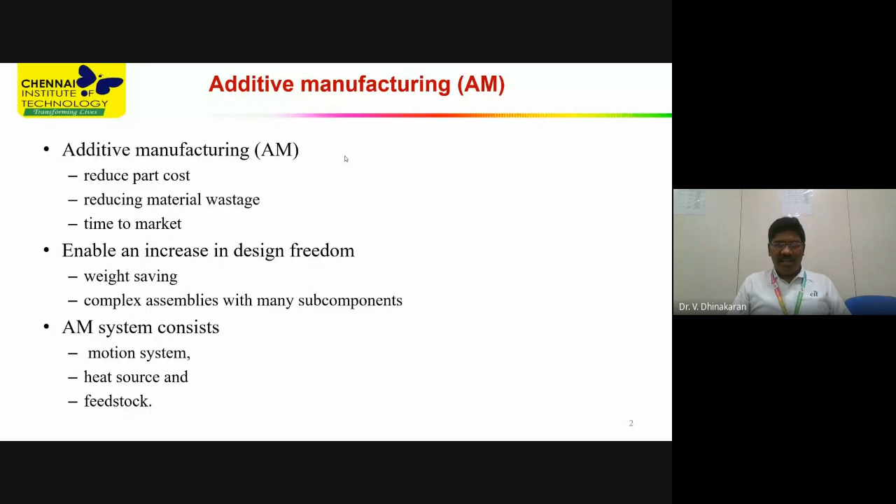For any additive manufacturing system, three components are very important. One is the motion system, another is the heat source, and another is the feedstock. These three systems are highly required in order to experience additive manufacturing.

So the basic difference between additive manufacturing, subtractive manufacturing, and formative manufacturing. In formative manufacturing, the molten metal has to be poured into the mold cavity, and the required component will be manufactured. Whereas in subtractive manufacturing, the raw material has to be processed through any one of the material processing technologies in order to get the correct component. In subtractive manufacturing, almost 50% of material is being utilized to manufacture the particular component. In a formative manufacturing system, the material has to be heated, and the molten material has to be poured into the mold cavity to form the part. Okay.

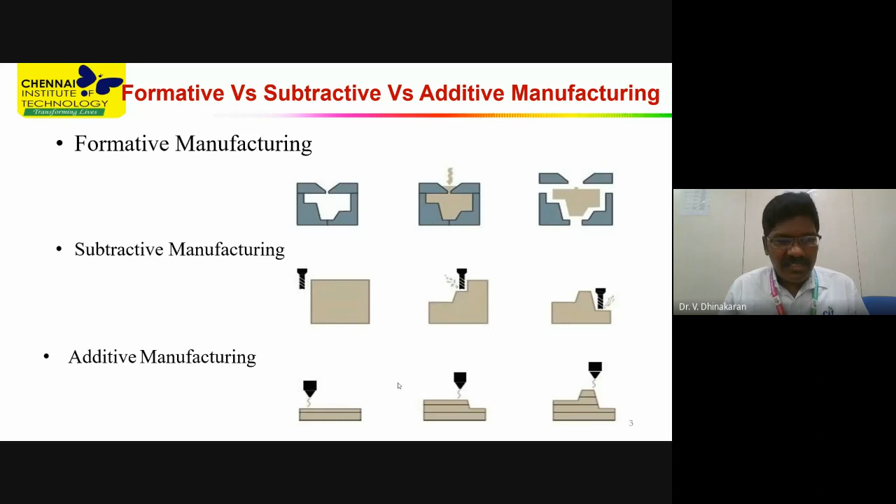So hence, we are highly concentrating on additive manufacturing to process the high-cost materials and the materials which are being used in the industries. So in additive manufacturing, what is being done? Here, you need to have CAD-based 3D models, and the 3D model has to be converted into a .stl file. You can use any modeling software to generate the CAD model, like CATIA or SolidWorks, and then the file type has to be converted into a .stl file.

After that, the .stl file is subjected to slicing into layers, because in additive manufacturing the product is manufactured layer by layer. Hence, according to our process, the entire product has to be sliced layer by layer. Then the sliced layers are given to the AM system, the additive manufacturing system, which manufactures the part. Once the part has been manufactured, it has to be processed to get the right product by using surface finishing methods. This is the general procedure used in additive manufacturing techniques.

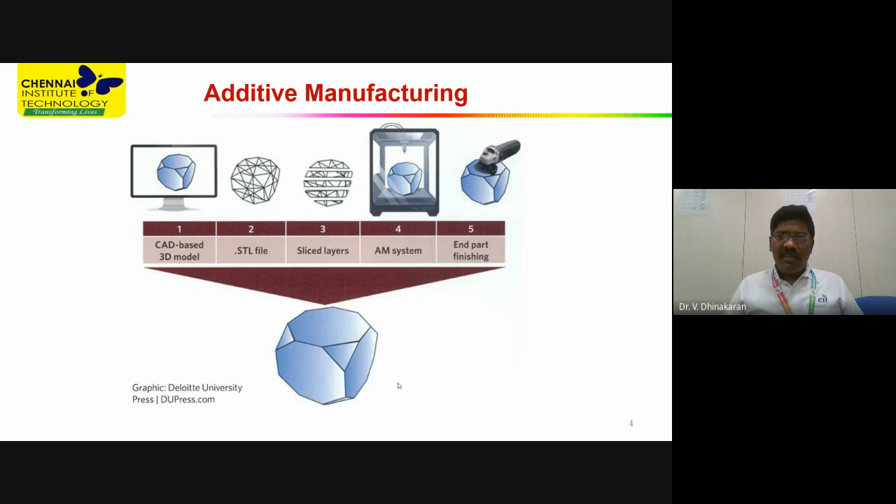So you should have the CAD models, which can be made with any modeling software. Then the file format of the model has to be converted into a .stl file. Then the file has to be sliced layer by layer. Then that has to be fed into the additive manufacturing system in order to produce the required component. Then it has to be finished to have a good surface finish.

Then, classification of additive manufacturing. As I said, three things are highly essential: one is the heat source, another one is the feedstock material, and another one is the motion system. Any additive manufacturing holds these three systems. Here we want to classify based on the heat source utilized. The heat source may be either a beam heat source or an arc heat source.

Beam heat source means you can use a laser beam or electron beam to manufacture the particular material. In both laser and electron beam, you can use either wire or powder. The wire can be melted by the laser, or the powder can be melted by the laser to produce the particular component. We will see how the laser is used to melt the wire or powder in the forthcoming slides.

The wire will be melted using a laser heat source or electron beam heat source, and that will be deposited in the substrate material in order to attain the correct shapes.

Okay, correct material. So we have laser as heat source, and wire is the feedstock material.

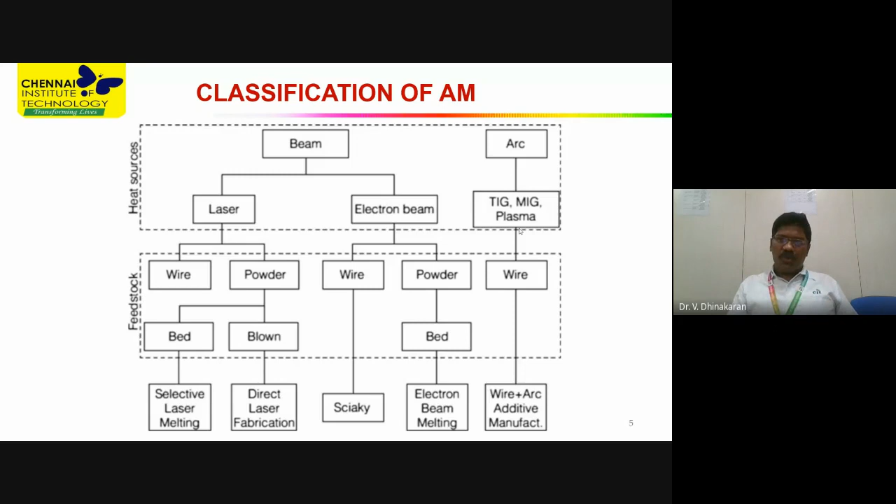So this is the classification based on the types of heat source used. Then, classification based on the technology or techniques.

So, binder jetting. When you use binder jetting technology, there may be two layers, and in between the two layers, a binder can be used to bond or make bonding between these two layers.

Okay, this is called powder bed and inkjet printing - powder bed and inkjet 3D printing. Based on the powder-based diffusion, as I said, you can use direct energy deposition.

Direct energy deposition means directly the wire will be melted, and it will be deposited on the surface.

Or directly the powder will be melted, and the melted powder or molten material will be deposited on the substrate material. That is called direct energy deposition.

Okay, directly your energy is utilized to melt the material, then the molten material is deposited on the surface. This is called direct energy deposition.

Whereas in the powder-based diffusion, the powder will be spread on the substrate material, then selectively...

with the help of the motion system, the laser heat will heat the material and the shape will be formed. This happens in the powder-based system.

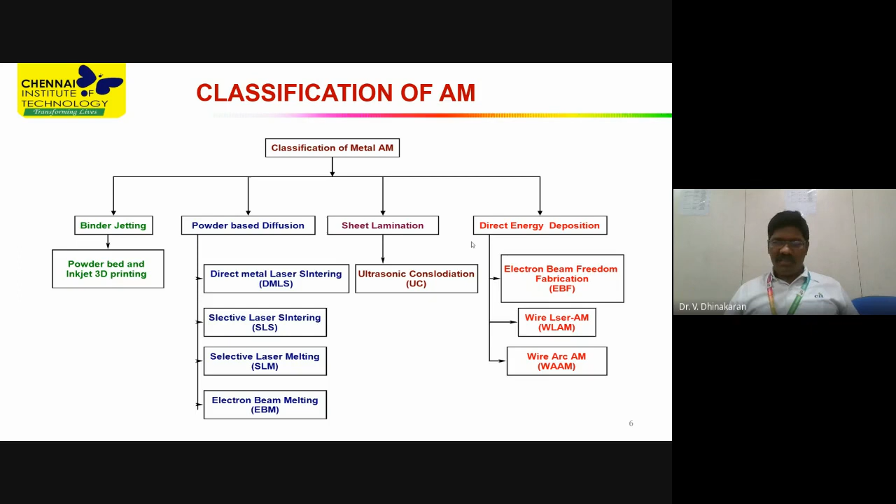Now further, I want to classify based on polymer utilization - how polymer materials are being utilized in additive manufacturing. Because when you go for metal additive manufacturing, it is very costly. So additive manufacturing will help you to realize the component immediately.

In olden days, what you needed to do was go for making the die. You are making the die, then the die has to be ordered from some other person, die manufacturers, then they will supply the die, then you will go for manufacturing the particular component. At that time only you would be able to touch and feel the component.

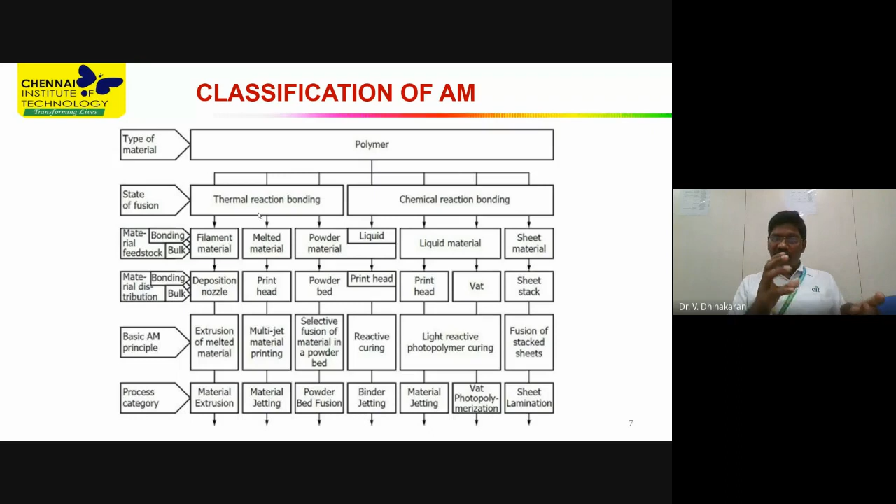Now you have modeling software. You will be able to design the component, you will be visualizing the 3D part, but it will not give the touch and feel effect. Now you have 3D printing machines. Since metal additive manufacturing is high cost, the machine cost is very high, you cannot immediately manufacture a particular part and you cannot visualize or have the touch and feel effect.

We have 3D printing technology, polymer printing technology, with low cost machines. Hence polymer is playing a major role when 3D printing is concerned. Generally there are two types of fusion being utilized: one is thermal reaction bonding, and the other is chemical reaction bonding.

In thermal reaction bonding, the filament material may be deposited or melted. The filament material will flow through the nozzle, while it is flowing through the nozzle it will be heated, and the molten material will be extruded through the nozzle and deposited on the particular surface in order to make the particular product.

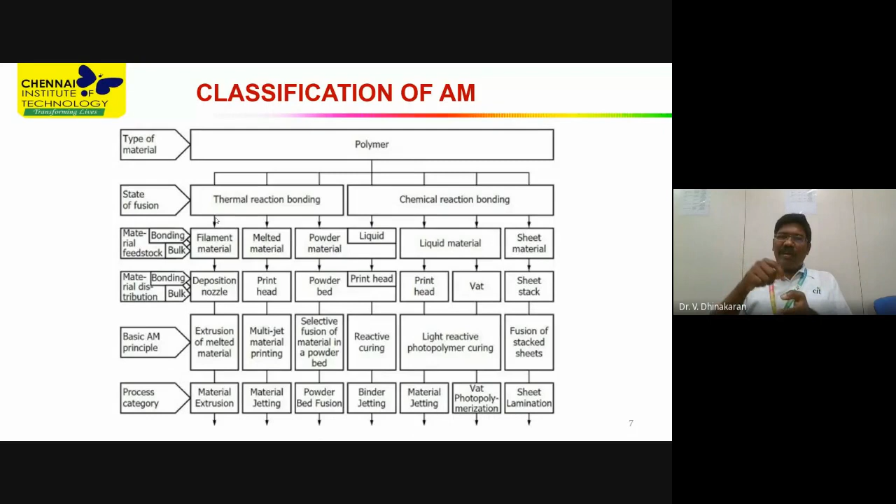In chemical reaction bonding, there is VAT photopolymerization. What is that process? There is a liquid material, and the liquid material is exposed to UV lighting, selectively exposed based on the component which is going to be manufactured. In the selective areas the liquid material is exposed, then the solid is formed, or the required component is formed. That is VAT photopolymerization, which happens because of chemical reaction bonding.

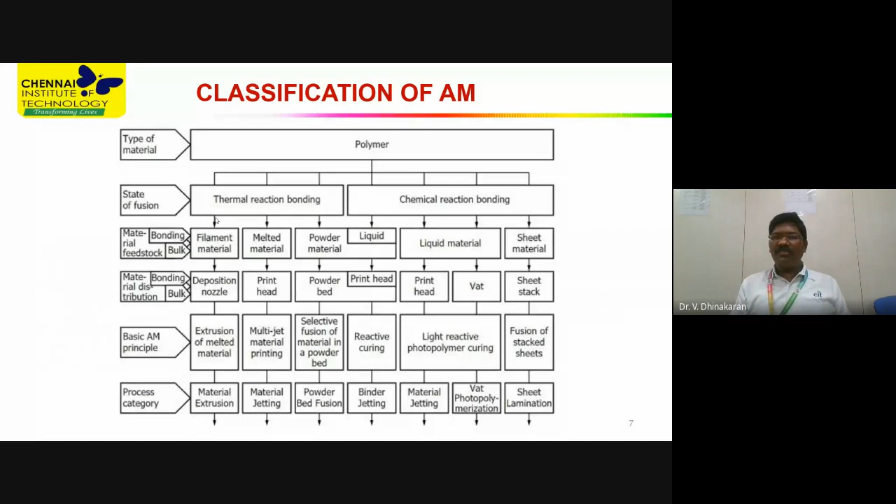These are the classifications of additive manufacturing based on thermal reaction bonding and chemical reaction bonding.

Now, where is additive manufacturing used? Nowadays it is used in all applications. But I want to mention a few. When you go for biomedical, it is being used. When you go for automotive, it is being used. When you go for aerospace, it is being used. When you want to make household materials, it is being used. So it is playing a role in all applications, and additive manufacturing has almost captured applications in the entire world.

Now it is being developed to overcome the traditional manufacturing system. However, mass manufacturing is still difficult in the case of additive manufacturing. But nowadays, different technologies are being emerged together in additive manufacturing in order to bring the manufacturing technique for mass manufacturing. A lot of developments are coming day by day.

For aerospace material, when you go for aerospace applications, you are using aluminum, stainless steel, titanium, cobalt, or nickel superalloys. When you compare these materials, titanium is highly used in aerospace applications.

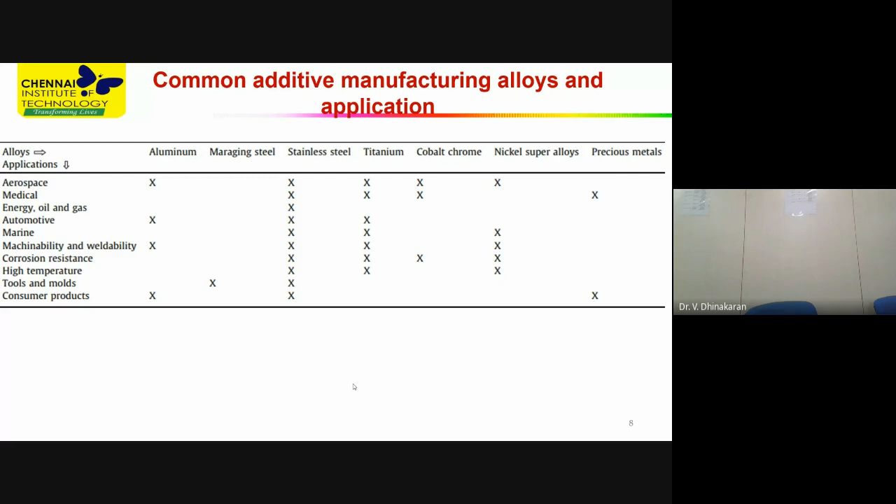Just a minute. Just a minute. Yeah, sorry for the interruption.

Titanium material is highly used in the aerospace industry. The reason is, when you compare titanium with stainless steel or aluminum: aluminum may have a density of 2,500 to 2,800 kilogram per metric cube. Stainless steel is around 7,000 to 7,800 kilogram per metric cube. Titanium is having only 4,000 to 4,200 kilogram per metric cube. So the density may be almost double that of aluminum, and maybe two-thirds of stainless steel. But the strength provided by titanium is enormous. Hence, titanium is highly used in the aerospace industry.

When you go for titanium and its family, Ti-6Al-4V is one of the important alloys used in aerospace as well as biomedical applications. It is simply called Ti64 in industry, and Ti64 is called the workhorse of titanium. The reason is, if 100% of material is going to be chosen from titanium and its alloys, 80% of that material will be chosen from Ti-64. Try to understand the importance of Ti-64 material. Hence, Ti-64 is one of the important materials as far as aerospace is concerned.

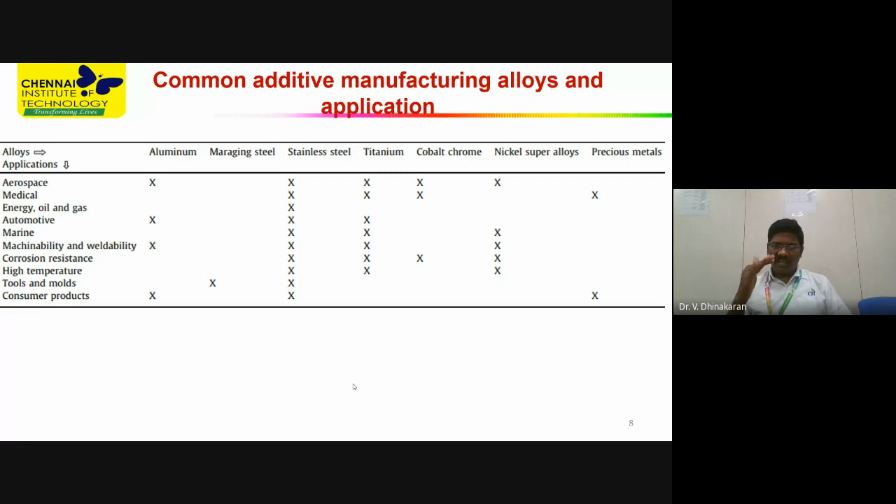Stainless steel is being used in energy and oil applications. Automotive applications use aluminum, stainless steel, or titanium. In automotive industry, nowadays they are slowly going to adopt weight reduction. Titanium is one of the better candidates, which is able to give higher strength than traditional materials like aluminum and stainless steel.

Applications are also chosen in areas where machinability and weldability are highly required. Among nickel-based superalloys, there are a lot of alloys: Inconel 718, Inconel 625, and Hastelloy. Among these grades, Inconel 718 and titanium have very good weldability characteristics, which is why they are used in different applications. We have personally experienced the joining of two Inconel plates and studied the weldability characteristics.

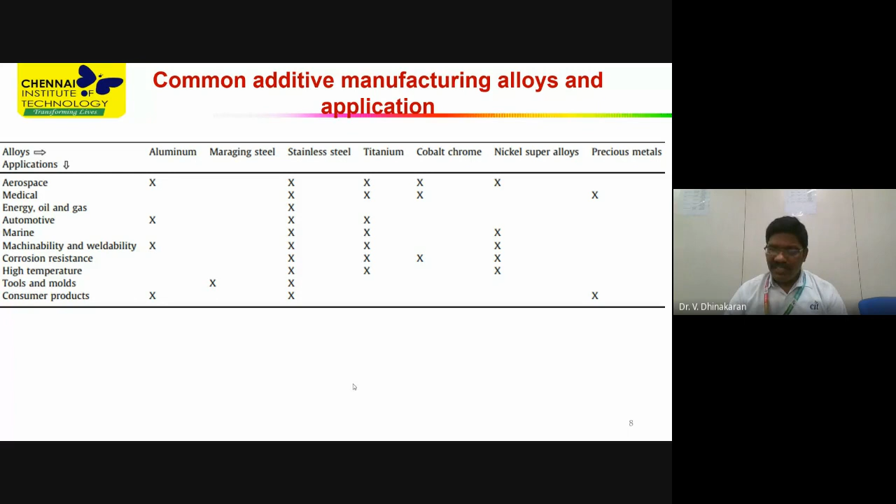Corrosion resistance is also very important when a material is used, like for marine applications. When used for marine applications, the material should have very high corrosion resistance. So in that area also, additive manufacturing is highly used, and tools and molds have to be manufactured in that industry too.

When you look into the materials used, 51% of materials are polymers in additive manufacturing, and 29% are metal and polymer. Polymers are commonly used, and 19.8% of metal is being used in the additive manufacturing industry.

Because of the low cost and easy availability, polymer material is highly used in additive manufacturing. And when you look into the application in the industries, the aerospace industry uses 18.9% of the additive manufacturing technology. It uses almost 19%, and the industry and business sector, to make machinery,

uses 20%. In the automotive sector, especially in motor vehicles, 16% of additive manufacturing technology is used; consumer products and power electronics and electronics 11.7%; medical and dental applications 11.3%; academic research and academic institutions 7.9%; and others 7%.

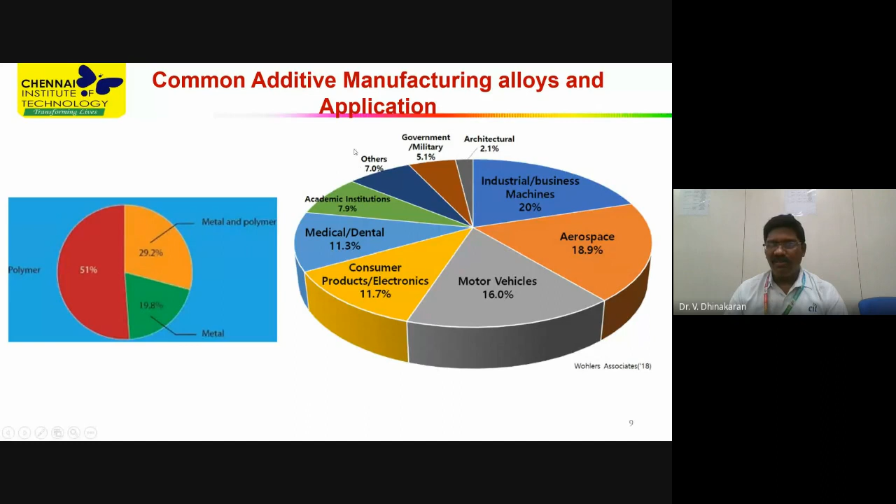Then the directed energy deposition method. I have already clearly explained it in the classification itself; however, we will see it with the video. As I said, the material will be coming through the injection nozzle. In the injection nozzle itself, the material will be heated by the laser beam. The material coming out from the nozzle will be a molten material. Then the molten material will be deposited on the substrate material in order to form the correct part. So this is happening in directed energy deposition.

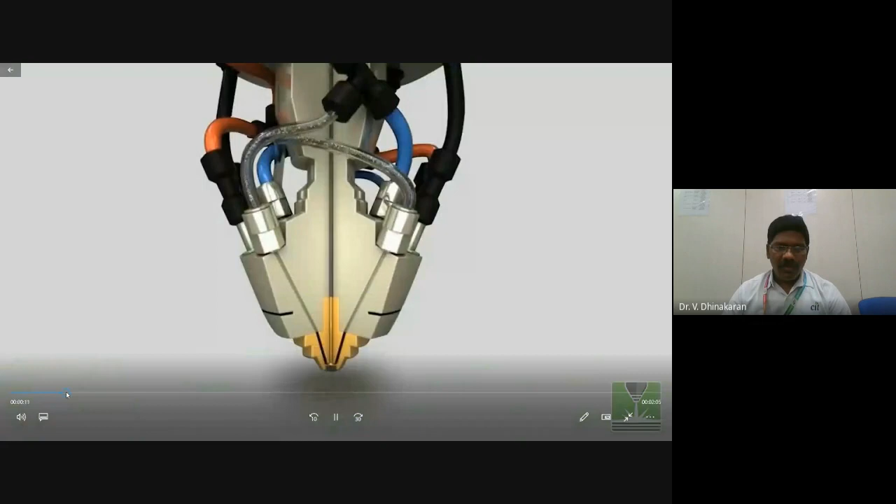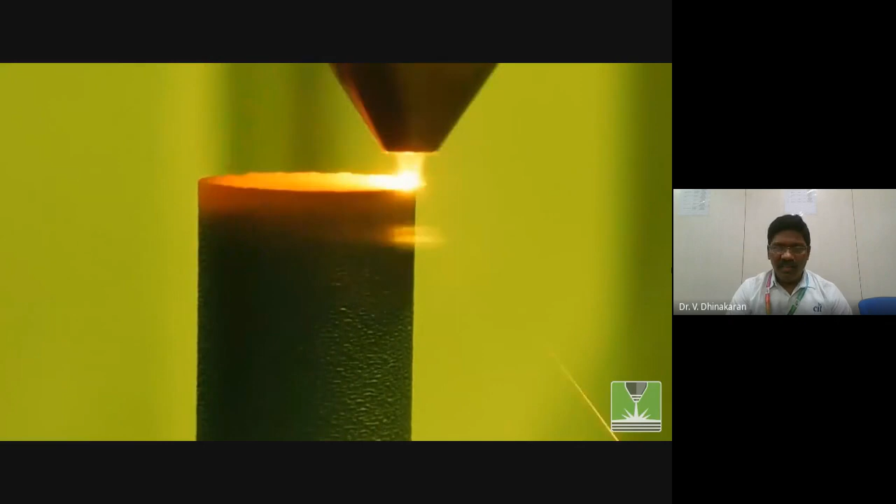So let me play a video. Please understand how this is being used. See, the powder is coming, and it is going to be melted by the laser. Here, see, the laser heat is coming. Observe once again, powder is coming. Immediately it is heated by the laser, and the molten material is formed. And it is deposited as per our requirement. This is directed energy deposition. See, from the nozzle, molten material is coming.

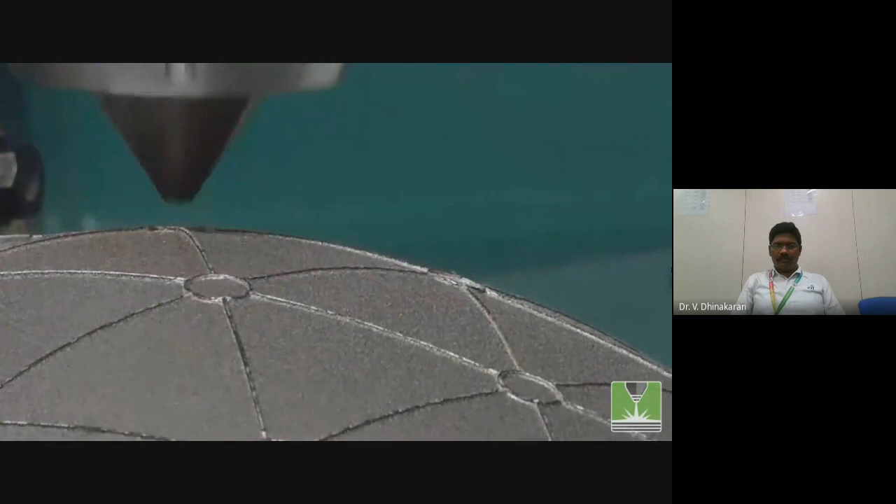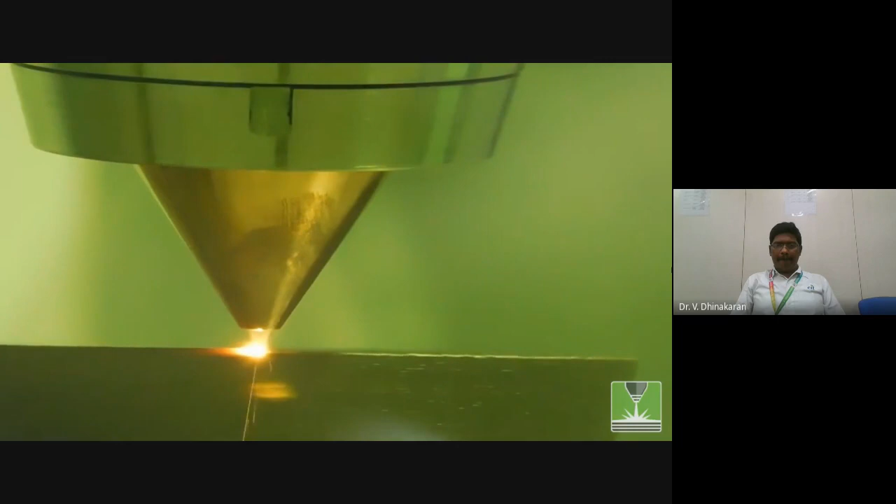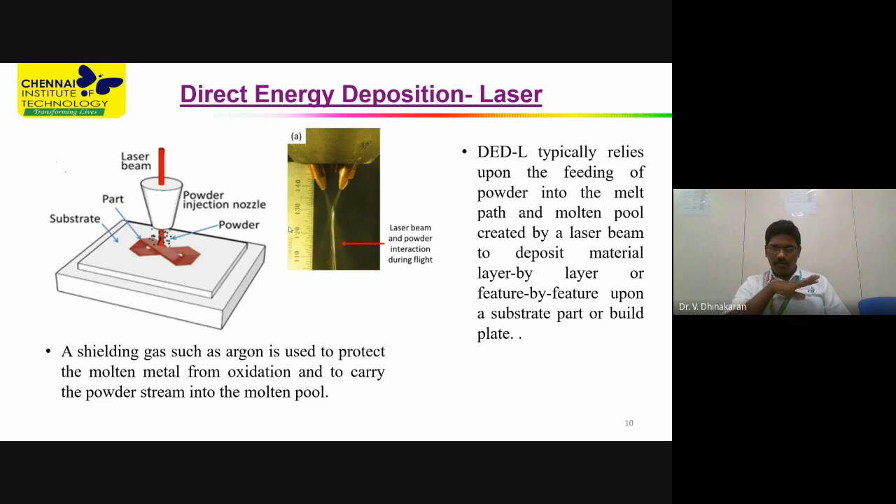So you might have understood clearly what direct energy deposition is. The material is melted in the nozzle itself, and it is deposited on the substrate material. Then electron beams. If you use wire arc, the wire is fed. The electron beam will melt the wire, and it will be deposited on the surface. So there will be a separate wire feeding system, and in order to have the correct shape of the part, the motion system will help to achieve the correct required part.

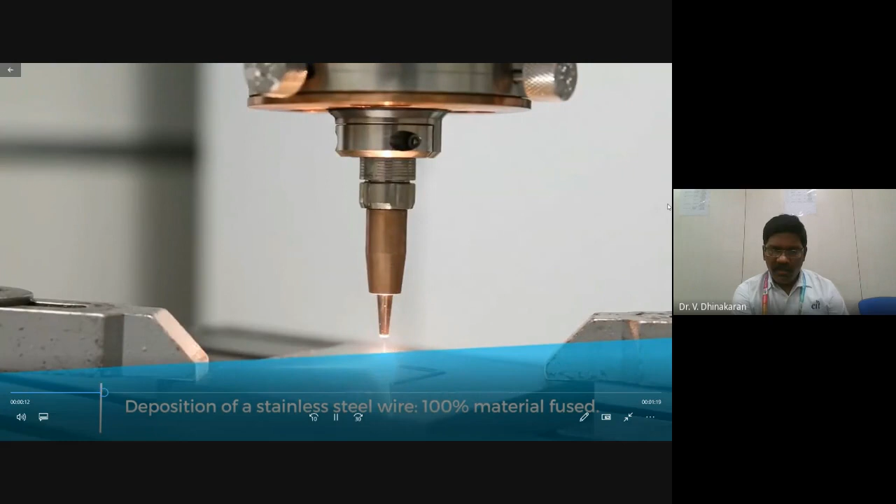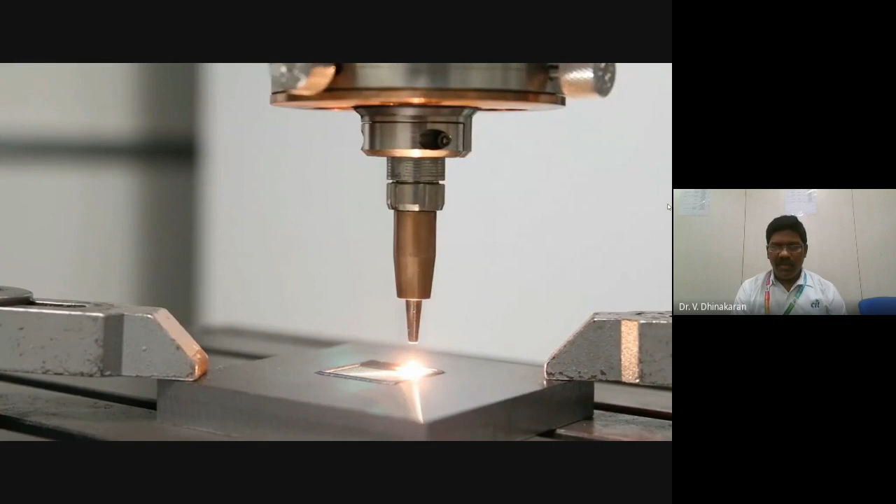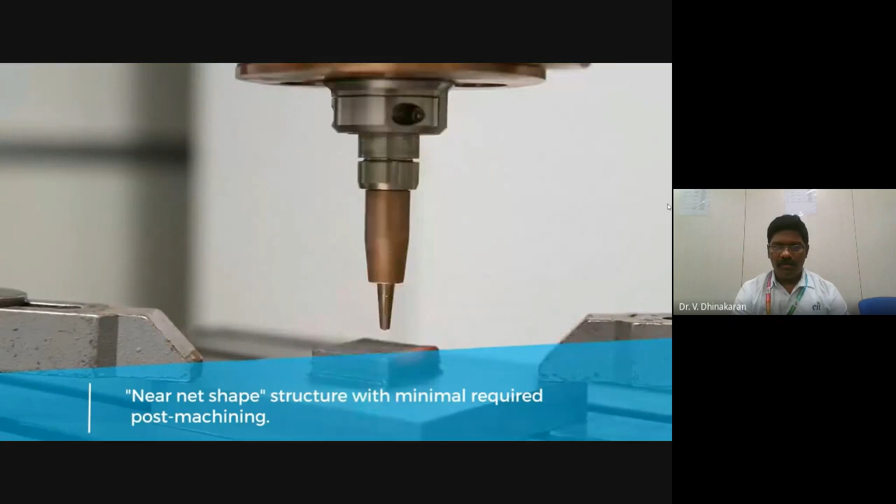As I said, you can use a TIG heat source, MIG heat source, or plasma heat source for these things. So let me play a video. See, the wire is coming from the nozzle, and it is heated by the laser source. Here an electron beam or laser heat can also be used. Please remember one thing: see how fast the part was manufactured by direct energy deposition in the previous video, and observe the volume of deposition in this video.

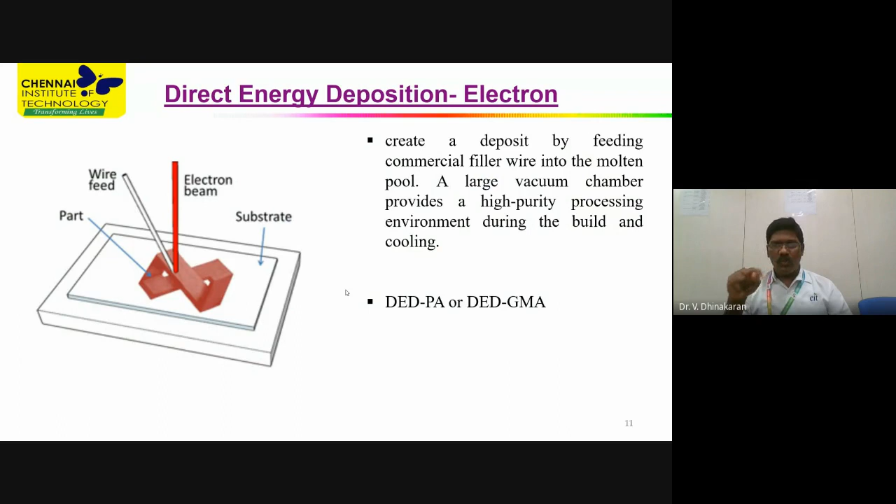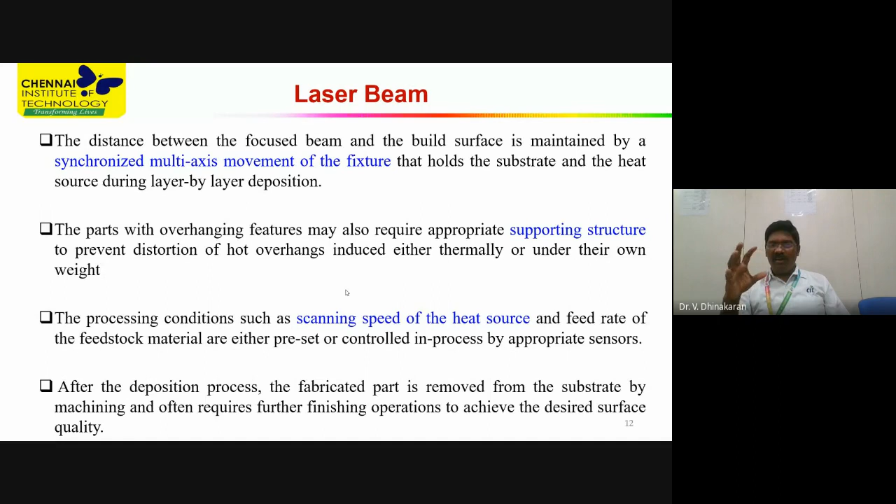So that is direct energy deposition and how the wire is utilized to form the correct shapes. When you use laser beam technology, the motion system is very important, and also the support structure. The support structure will help you to prevent distortion. And the scanning speed of the heat source plays a major role when you use powder bed technology. I'll tell you why.

In powder bed fusion, as I said, the powder will first be spread on the bed. Then, based on the part to be manufactured, it is selectively heated and melted. Then another layer of powder will be added, then it will be melted. Then another layer of powder will be added, then it will be melted. Like that, the required component will be manufactured.

What will happen once the first layer is made? It will come down. Then it will move to coat a powder layer. Then it will be heated. Then it will come down, then move up to coat another layer. Like that, the required part will be manufactured. The control system is essential to obtain the correct part. So let me play the video. So the CAD model is made.

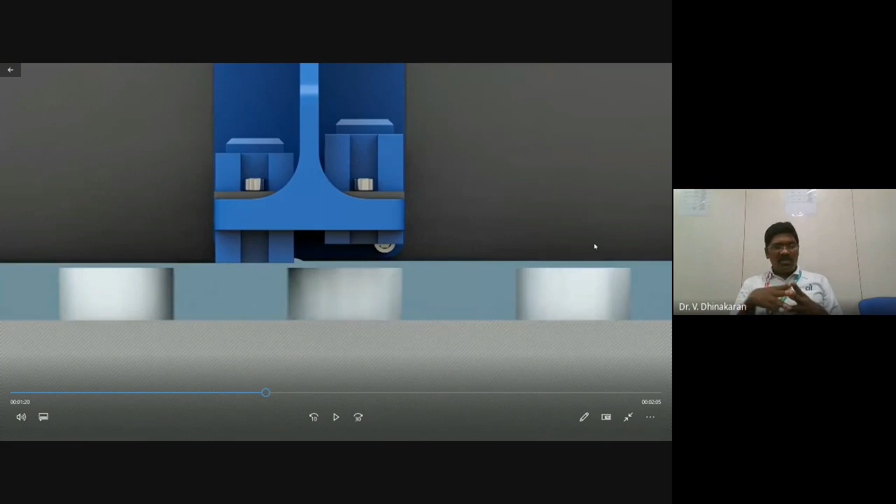The primary use of argon gas is to protect the molten pool, or to isolate the molten pool from the environment. As I said, at higher temperature the material will easily combine with the oxygen in the environment, so there should be protection. The protection can be made with any inert gas, maybe argon or nitrogen or helium or a combination of argon and helium. Mostly argon is used with 99.9% purity.

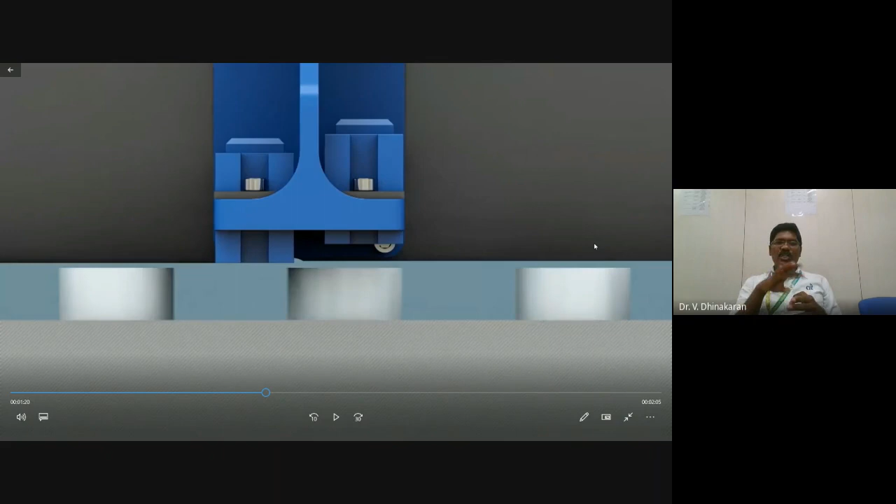Mostly argon is used as the inert gas. So please understand, when the titanium material or powder is heated at higher temperature, it can easily combine with the atmospheric gases and form oxide easily, which is not good. Hence, we need to protect the molten pool from the atmosphere. Hence, an inert atmosphere is created, and in order to create an inert atmosphere, argon gas is used.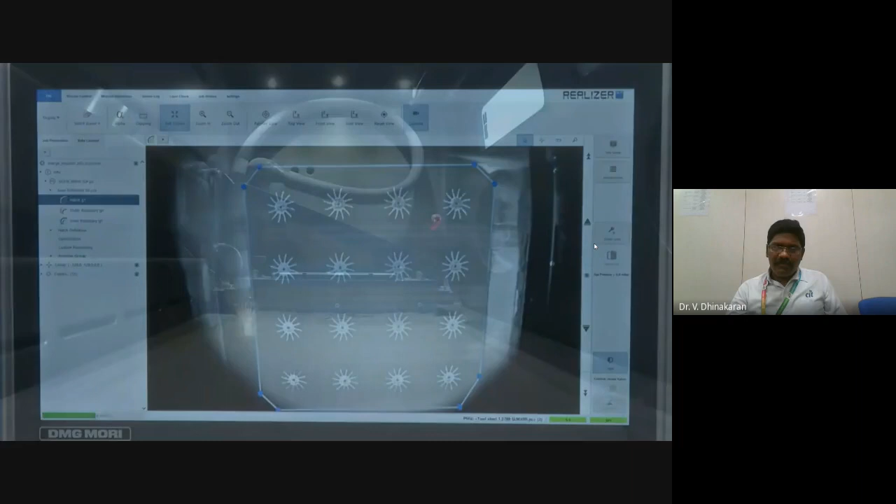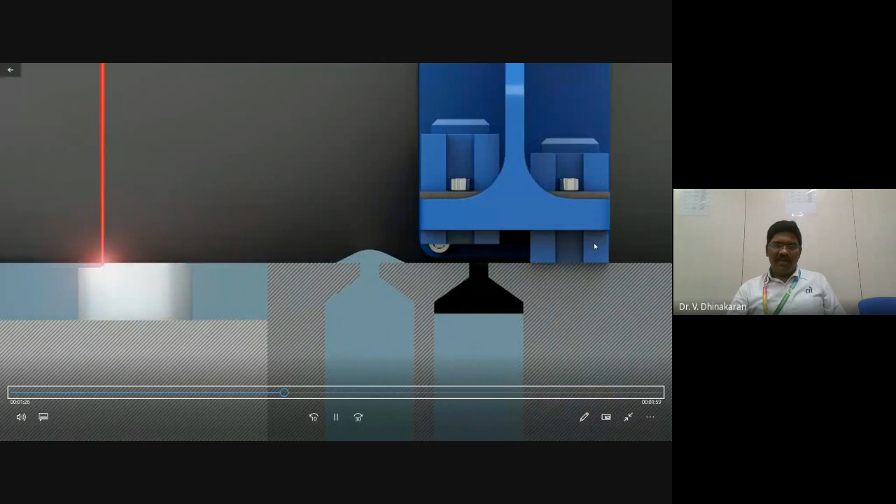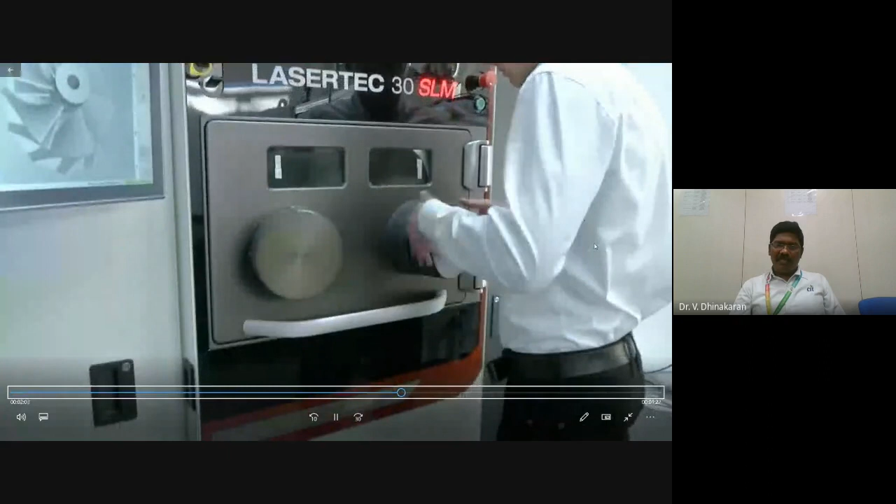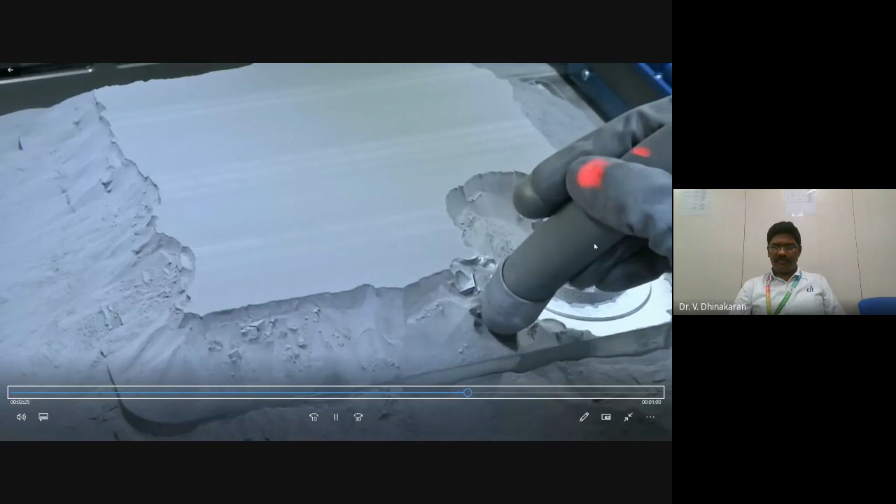See, the excess powder is removed. Then it is selectively heating, selectively melting based on our requirements. Once it is completed, it has to be blown with air to identify the parts. You will be able to manufacture multiple parts based on the bed dimension.

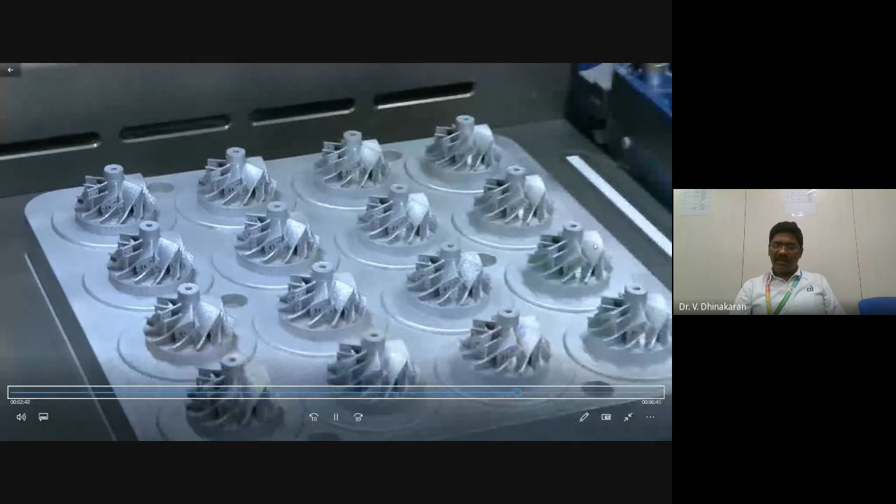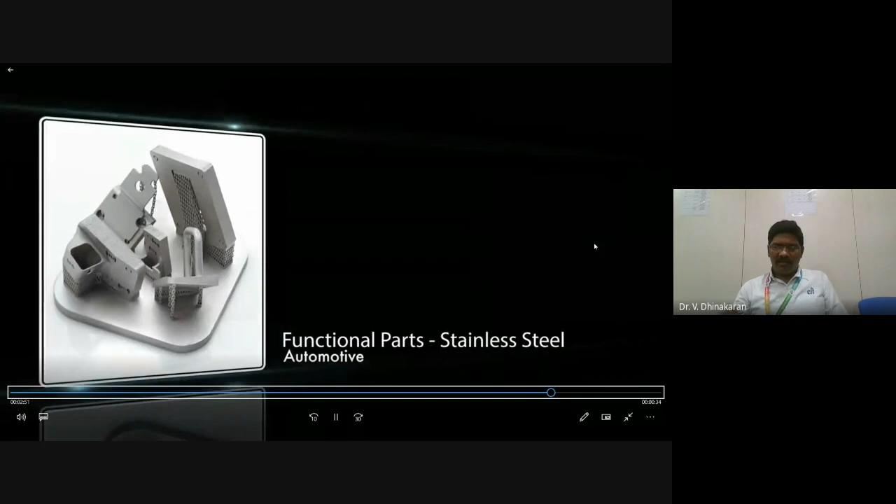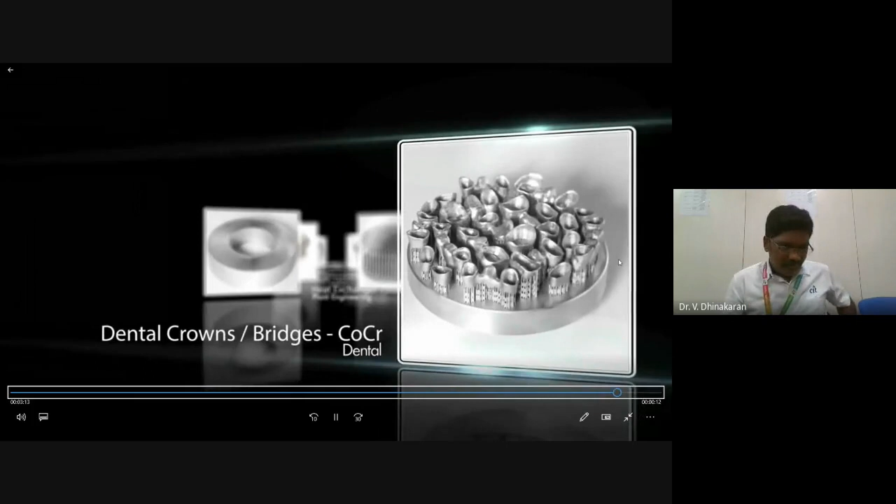Titanium blades. Sensor elements, heat exchanger. So this is how the powder bed fusion technology works.

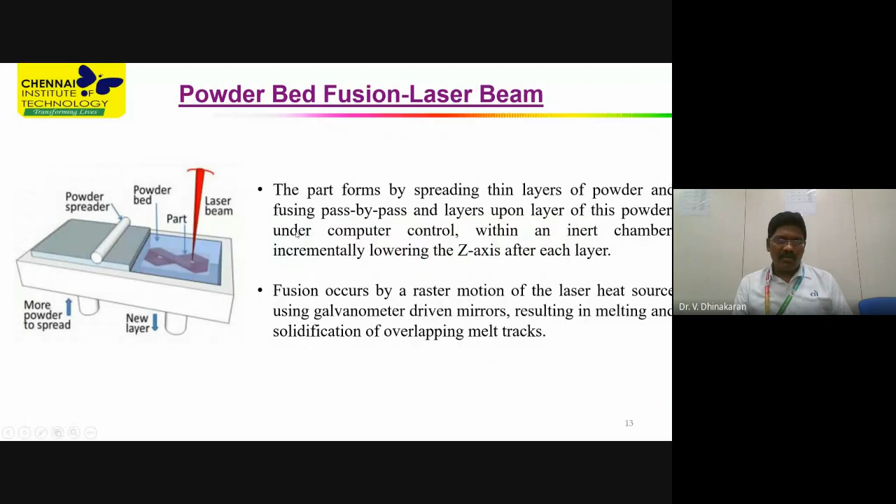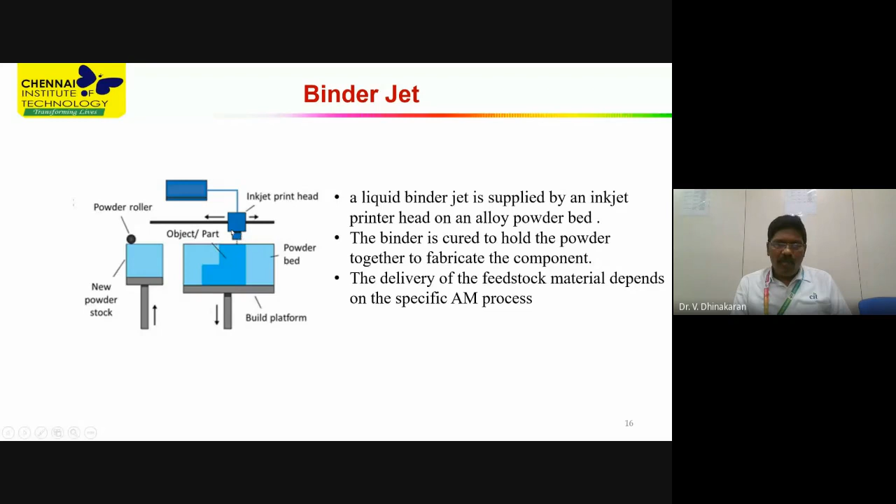In the binder jet process, as I said, there is a powder bed. On the powder bed, the ink, the liquid, is applied. Once the liquid is applied, the roller will spread the powder. Then the ink will be applied, then it will spread the powder, then ink will be applied. Like that, the required part will be manufactured in the binder jet technique.

The fused deposition modeling, the FDM technique, is available in almost all educational institutions. Also, now the price has been reduced drastically. You will be able to purchase an FDM machine even for 20,000 rupees. It is available everywhere.

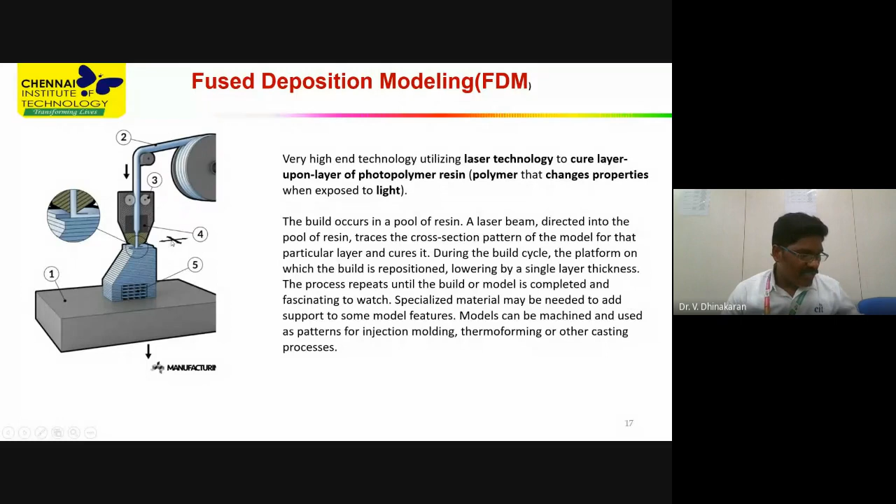See, the filament material comes from the wire spool. The wire filament will come through the nozzle, where it is heated by a heating element, maybe an electric heater. Then the molten material will be deposited on the substrate material to arrive at the required component. This is what happens in fused deposition modeling.

See the wire spool. You can have multiple spools and multiple nozzles also, in order to have different colors, or to reduce the part manufacturing time. You can use a multi-spool or multi-head nozzle to manufacture the particular product to reduce the time.

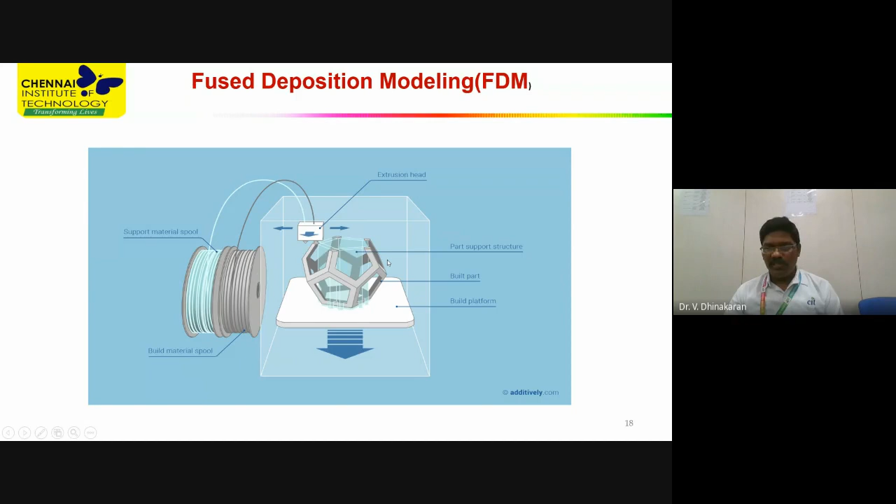Then, how can you characterize the AM process? See, production time plays a major role. How does production time play a major role? As I said, observe the volume of deposition in the two different technologies, the powder-based additive manufacturing technology and direct energy deposition techniques.

In direct energy deposition, the volume of part manufacturing will be very high. Whereas in the powder-based additive manufacturing technique, it is sliced layer by layer into thin layers, and slowly the part is manufactured, so the part manufacturing time will be very high in powder-based technology, whereas in direct energy deposition the volume of deposition will be very high. And also in the direct energy deposition technique, when you use powder, the volume of deposition will be very less.

And when you use wire, the volume of deposition will be very high. Okay, so the production time is very, very important. The production time will be very high when you use powder-based technology, and also when you use powder-based direct energy deposition. And the production time will be very less when you go for wire-based direct energy deposition technique. And this is the first thing.

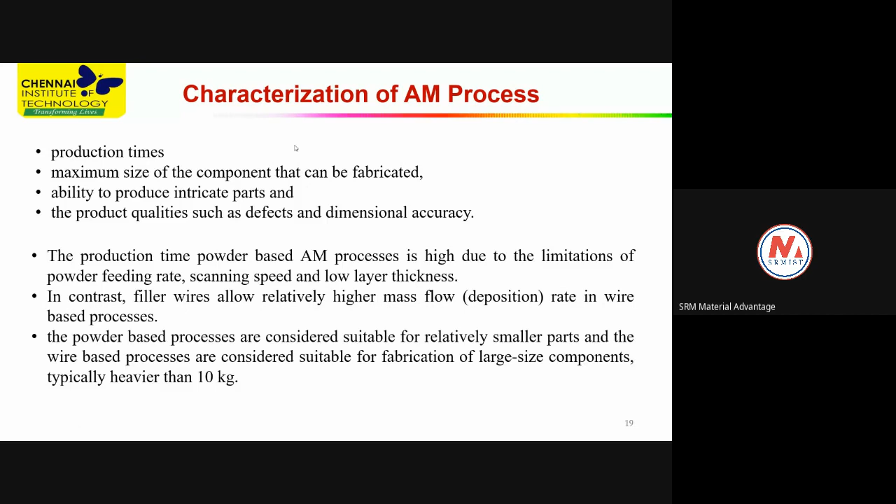And organizer, how much time can I take further? Sir, it is almost 5, so I guess 5 minutes. I will take 5 minutes. We will complete within 5. Then 5 minutes can be given for questions and answers. Okay. Sure, sir.

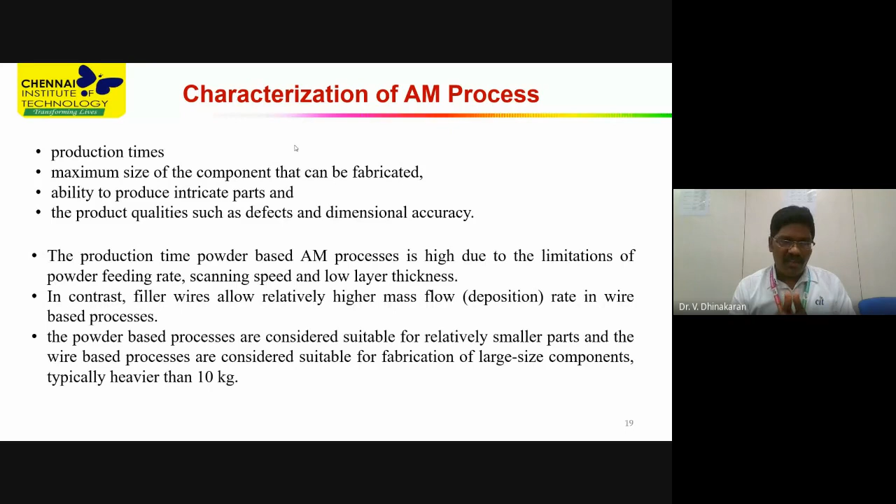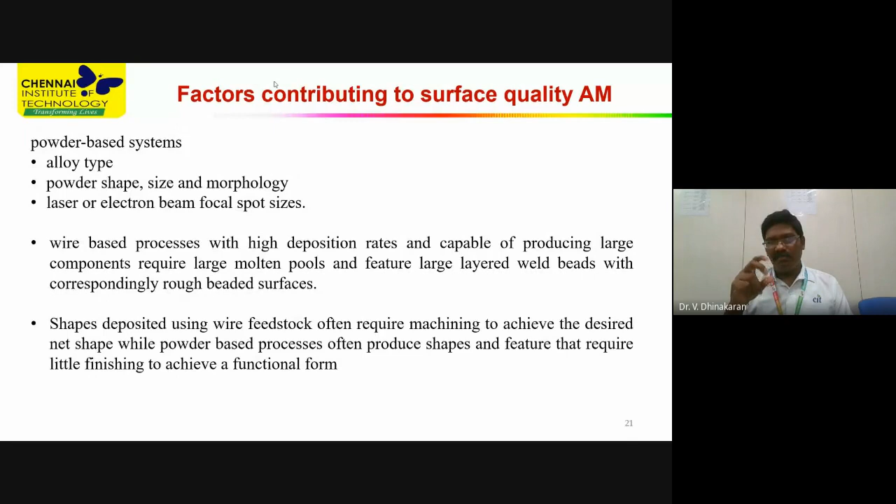Okay. And a good surface finish is required, and I said where good surface is required. Then factors contributing to the surface quality. Surface quality is contributed by alloy type, what alloy is to be used for manufacturing a particular component, and then powder morphology, powder shape, size, and types of heat source and focal spot size. Laser focal spot. When large focal spot sizes are chosen, it may not be appropriate for some of the components. So the focal spot size is also very, very important, contributing to the surface quality of the AM.

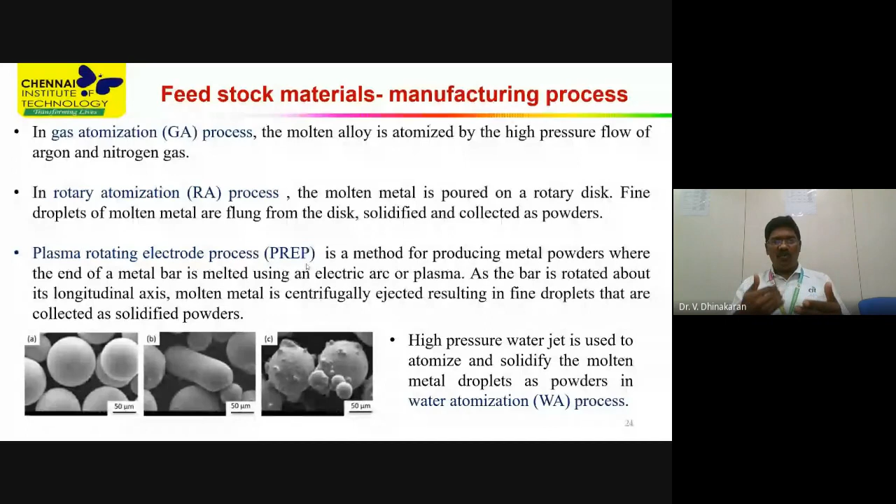In the accuracy level, when you go for the PREP process, the morphology will be very fine. You will be able to obtain fine particles. But the cost of the powder will be very high when it is produced by the plasma rotating electrode process or PREP process. Then the cost will be somewhat lower for rotary atomization and for gas atomization process. Feedstock material is very important.

You should understand the principles of heat and mass transfer and fluid flow. The process will be similar to welding. However, it is not highly related to welding; the process is different. In welding, for the particular instant, entire materials are melted together, and the local melt pool is formed, then solidifies. Here in additive manufacturing, it is not like that. For example, for powder-based technology, first a single layer is formed by forming liquid, then it is solidified, then another layer of powder is coated. The technology is different.

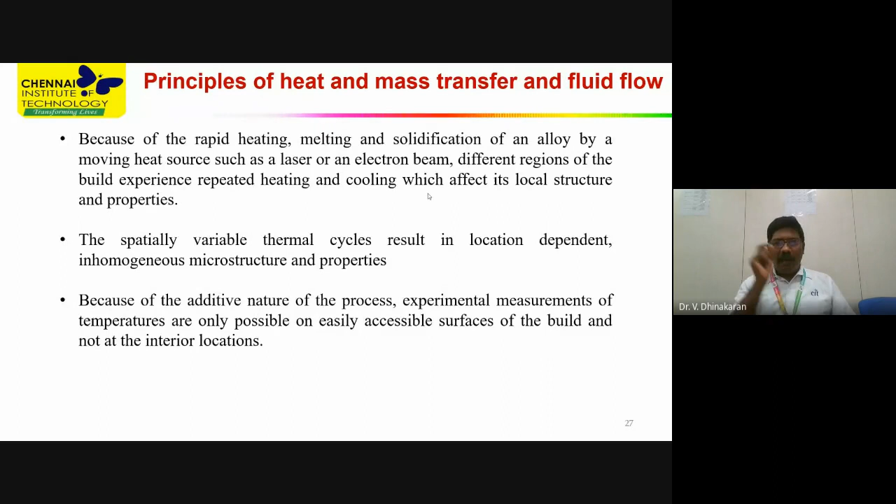So you have to carefully understand the principle of heat here, that means transport phenomena. Heat, mass transfer, and fluid flow can be simply called transport phenomena. So you should understand the principles of transport phenomena in wire arc additive manufacturing. Then the heat source. The heat source is very important when you go for numerical modeling.

Now we are using titanium material, zirconium material. These are high cost materials. You cannot physically manufacture with all the materials; you cannot spend the time and the cost. So hence you can go for numerical simulation or computational mechanics, where the heat source model will be playing a major role. Heat source model means how the heat is penetrating into the material, especially the double ellipsoidal heat source, conical Gaussian heat source, modified three-dimensional Gaussian heat source.

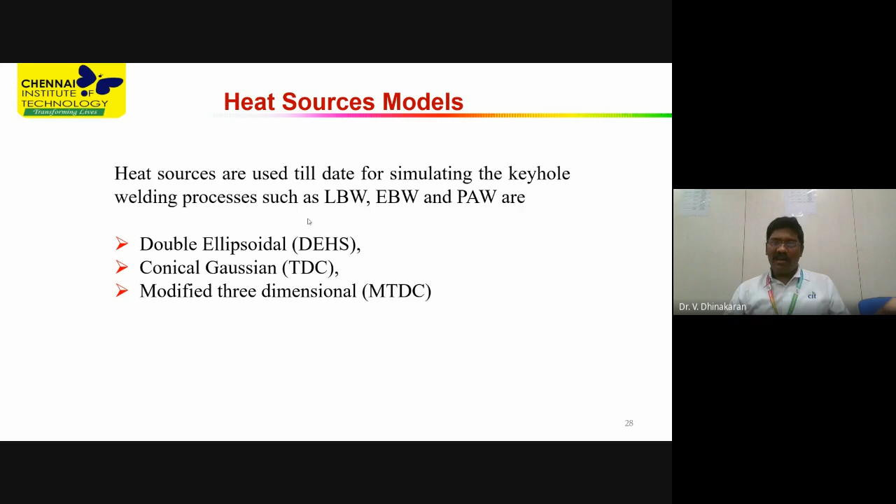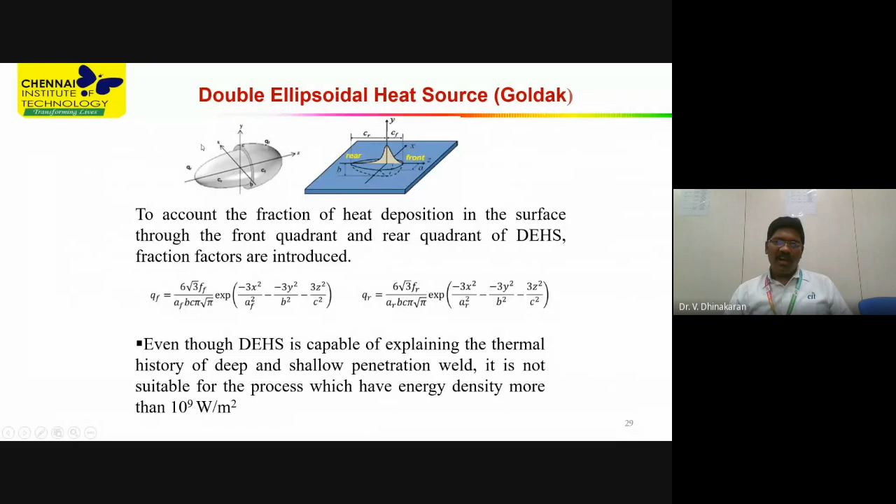These are the heat sources which are available to simulate the laser beam additive manufacturing process, or electron beam additive manufacturing process, or plasma arc based additive manufacturing process. The double ellipsoidal heat source assumes two ellipses as the heat source to mimic the particular process, and then they use a 3D volumetric heat source, then a modified three-dimensional heat source.

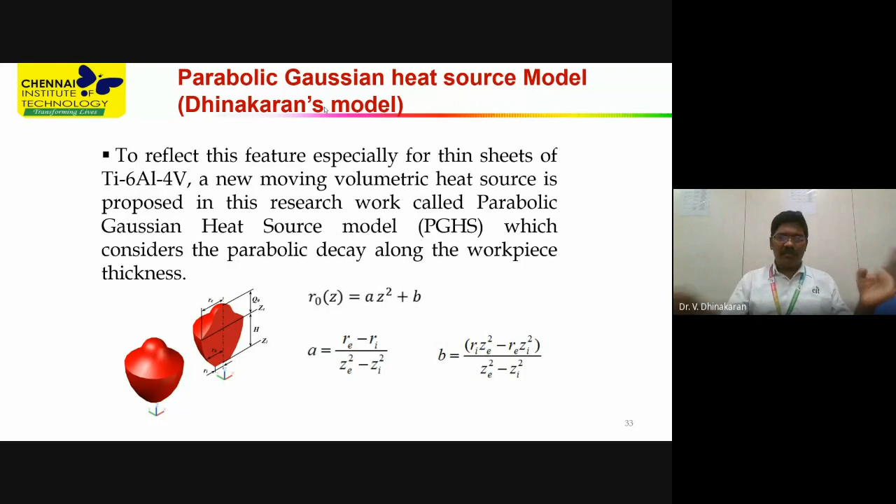Now I am going to propose. I have already proposed Dhinakaran's heat source model for welding. Now I am doing research to use Dhinakaran's model in numerical simulation in order to mimic the wire arc additive manufacturing process. So I told how Dhinakaran's model has been brought out, and the final simulation.

So if you want to analyze only the temperature distribution, then you can use Fourier's law of heat conduction and go for FE analysis. This is the general three-dimensional Fourier's heat conduction law. In this, Q_V represents the heat source model.

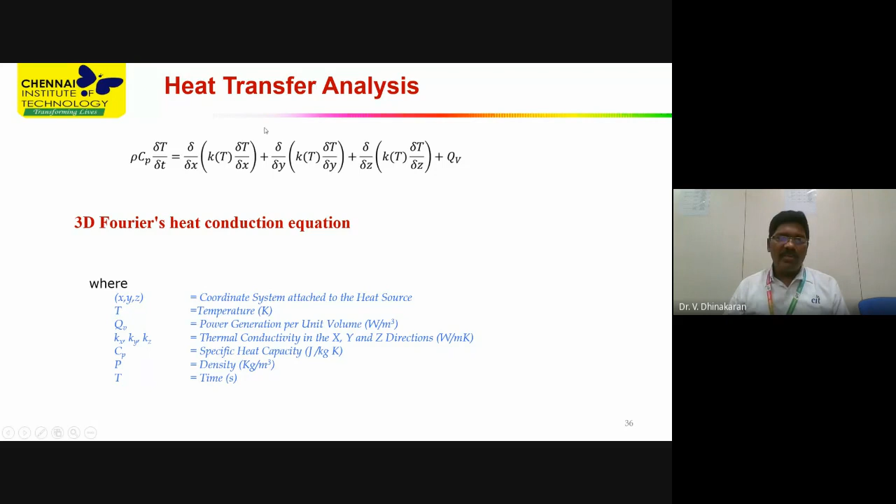The particular heat source model, either Gaussian heat source or double ellipsoidal heat source or volumetric heat source or Dhinakaran's heat source, can be used, and the equations can be substituted, and this equation can be solved by any FEA system, finite element method, by applying proper boundary conditions. These are the boundary conditions that can be used.

And see, when you go for only thermomechanical analysis, you can use Fourier's law of heat conduction to predict the temperature distribution. Further, the temperature can be given as the input for the structural model. Then the structural model will help you to predict the distortion and all.

But when you go for analyzing the fluid flow, and especially transport phenomena, then you should consider conservation of mass, conservation of momentum, and conservation of energy. For conservation of energy, simply you can use Fourier's law of heat conduction. For conservation of momentum, you should use what we call the Navier-Stokes equation, and also different forces, like Marangoni force, in the fluid flow.

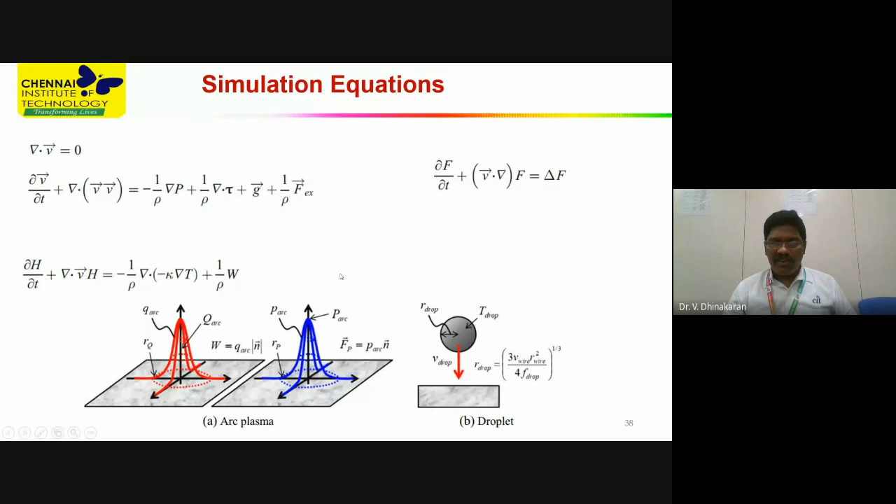In the fluid flow, a lot of forces are occurring: Marangoni force, Lorentz force, electromagnetic force. These forces should be considered, and conservation of mass should be considered, in order to simulate these things. And a model can be used on a single layer, the 11th layer, and 12th layer.

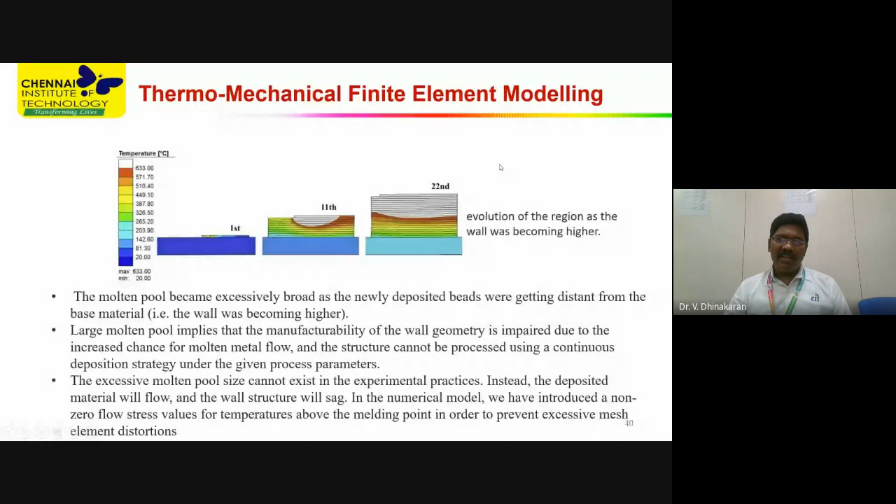See, you can observe the temperature distribution in a different manner in the first layer and 22nd layer, because when the first layer is formed, it has enough place for the temperature distribution. The heat transfer can take place, but here there is immediately one layer over another layer. There will be much more area for the transfer of heat. So the fluid flow can be beautifully generated by using any software.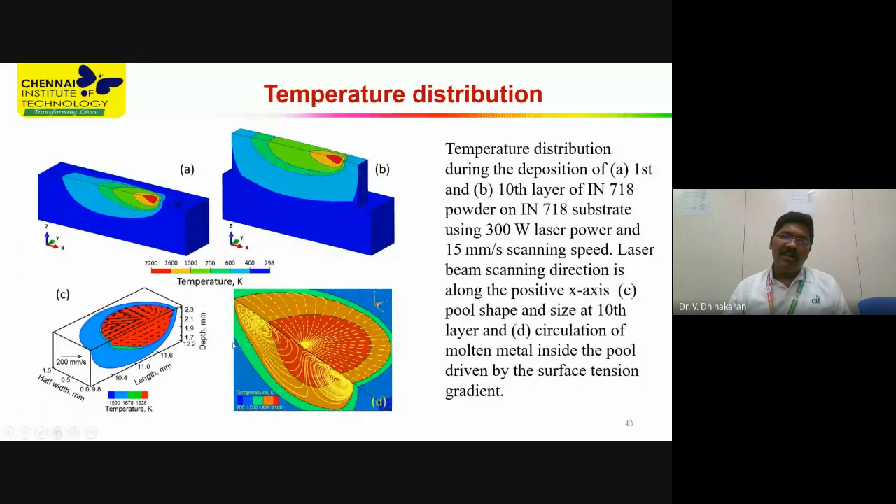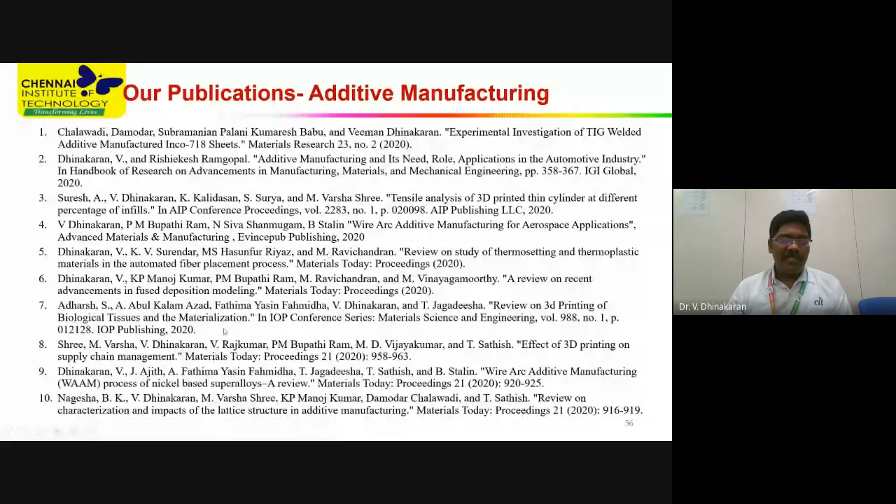So these are the publications we have based on additive manufacturing from our group. We have published more than 15 research articles in additive manufacturing, and these are the references which have helped me to present this expert talk. And also I would like to thank Dr. DebRoy, who is a professor at Pennsylvania State University. He is from India. His lecture and his research publications also helped me to present this lecture.